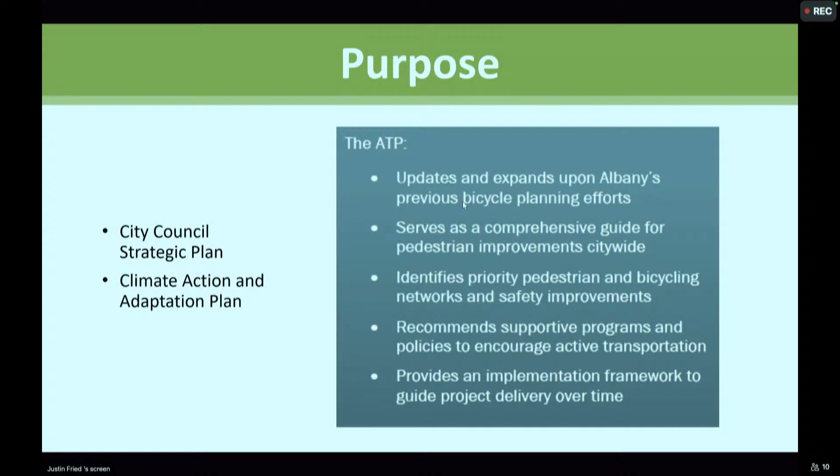Briefly recapping the work that's gone into bringing us to tonight: the update process has gone through three phases. The first established the goals and reviewed existing conditions of the network today. The second focused on the future vision for both the pedestrian and cyclist networks. The third identified priority policies, programs, and projects to implement that vision.

Each of these phases went through a series of development, starting with a technical advisory committee made up of city and partner agencies, departments, and representatives to review materials, then a public community meeting and online engagement, then bringing the content to the Transportation Commission for discussion and feedback, and then on to City Council. We've gone through three rounds of this, developing the plan content packaged and provided to you tonight.

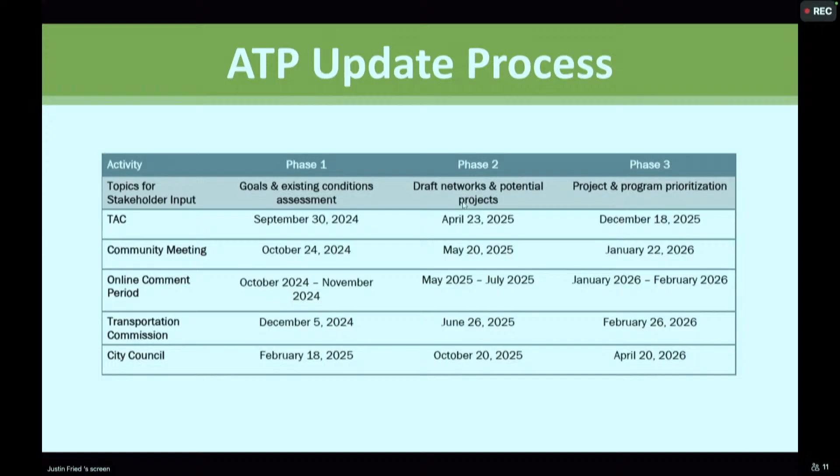Aside from those phases of development, we also had a couple of focused parallel engagements that took place. One was looking at schools, really starting with a kickoff meeting with AUSD site leadership to talk about how to effectively engage the school community.

The culmination of this engagement was in May and June of last year, where we engaged with a range of AUSD stakeholders, had one-on-one meetings with each of the principals, attended two coffee with the principal parent meetings, and had a discussion with the high school leadership advisory students. That led to what's in the plan tonight: specific school access projects that are identified, and several of which are priority projects in the recommendation.

The other focus area was really on Solano Avenue. In May of last year, City Council provided direction for city staff through this process to develop an alternative configuration for the street that reorganizes parking to parallel on one side and 60-degree angle parking on the other, to provide an uphill separated cycle track.

In May through July of last year, the engagement on the future network included a discussion of the Solano Avenue corridor. We had a focused technical advisory committee discussion specific to Solano Avenue in August of last year, followed by door-to-door and online outreach to Solano businesses to talk through concepts.

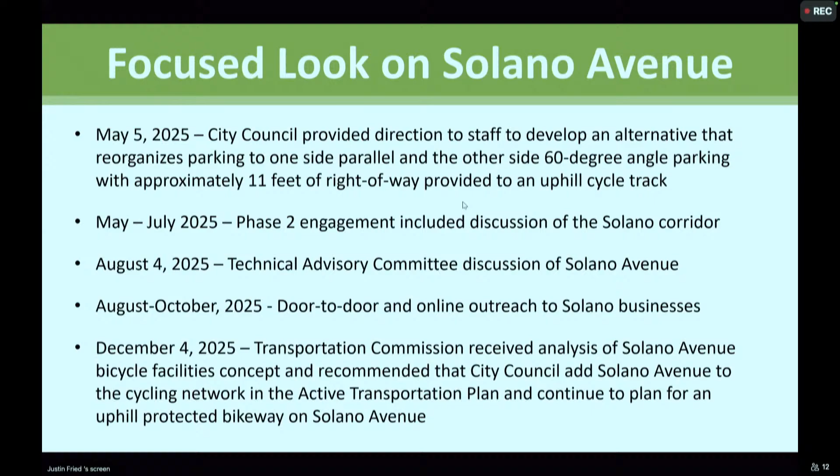I'll also note, since this was a topic of discussion at various points in the development, we called out a focus on how we're using terminology in this document. Walking, biking, and rolling is a term used to reference that there are a range of different mobility options and users of these networks. We do still use pedestrian network and bicycle or cycling network because they are often distinct. There are places, like shared use paths, where they are the same, but in other instances they are separate facilities.

But we want to acknowledge that when we're using those terms, they are speaking to a wider range of users than just a fully mobile person walking. There are a range of people using the pedestrian network, and similarly, a range of devices now using the cycling network.

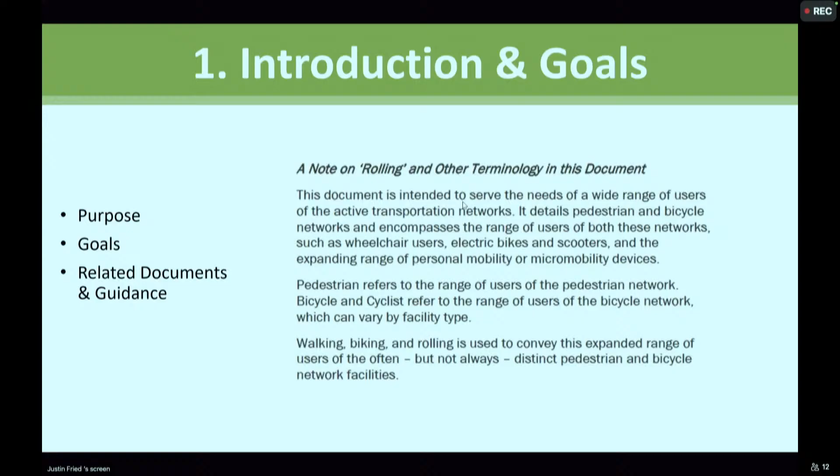As I talked through already, in the work that we've done over the past two years, the second chapter really focuses on detailing that work, the flow of development of the content that's in the document, and the stakeholder engagement that went along with that.

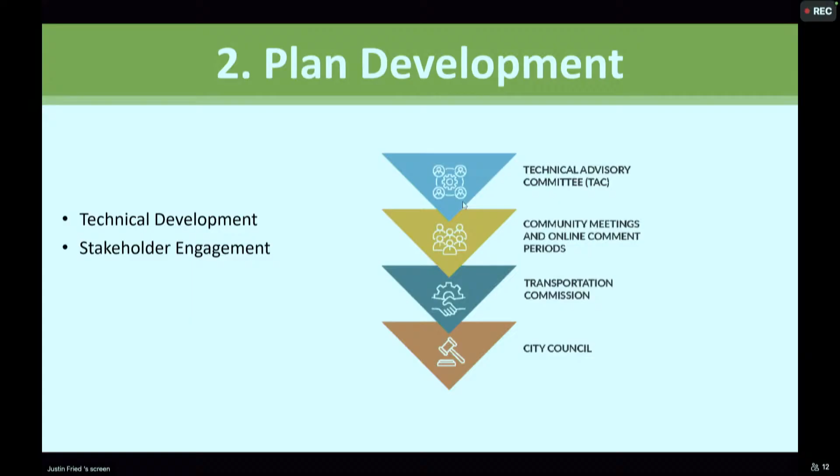The third chapter is the existing conditions review. There were a couple things I noted in the staff memo that are new to this chapter, so just highlighting that for the commission. One is, within the existing mobility networks, there's now a discussion of existing bicycle parking and survey work that was done for that.

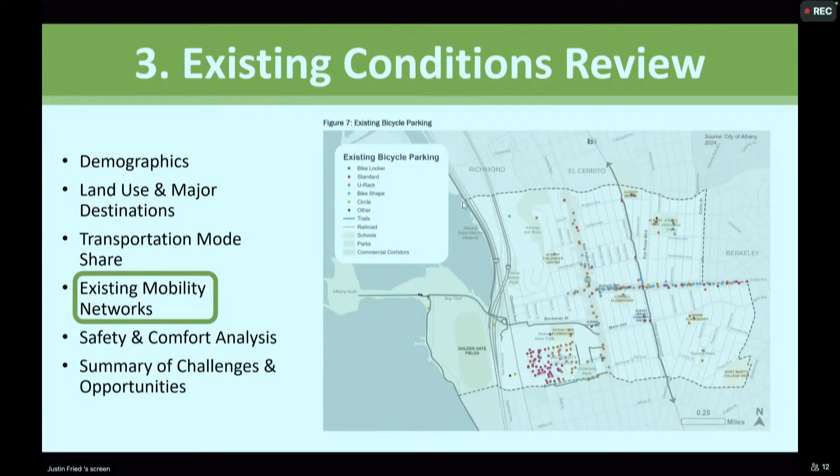And in the safety and comfort analysis, there is work that was presented during the second phase, but is really an existing condition analysis of the pedestrian network and the sidewalk gaps and challenges that exist on the current network.

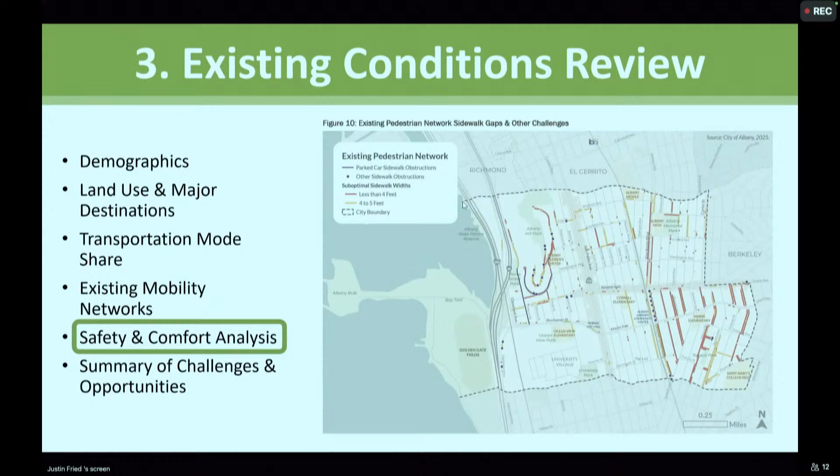Chapter 4 details policy and program recommendations, and just calling out that the policy recommendations—I believe this is the first look at that. It was developed earlier, but I don't think we presented them directly to the commission before now. So that is a new element.

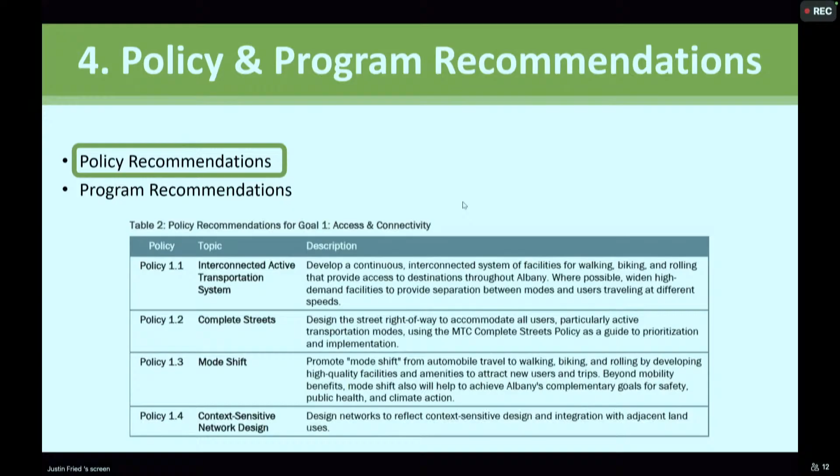And then Chapter 5 gets into the network recommendations. This was the outcome of that second phase of plan development. It details the active transportation networks, the network quality guidelines associated with those, and really talks through the levels of the networks that are developed and the priority biking and pedestrian networks that have a higher comfort guidance for those.

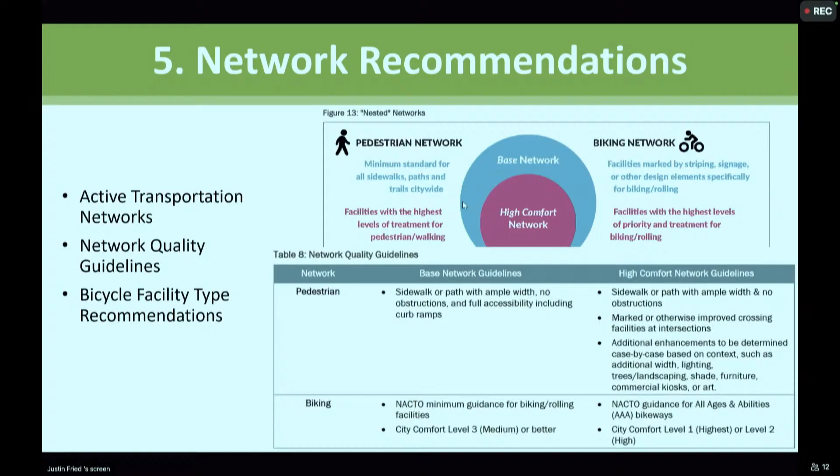And then calling out a couple of new items, just to highlight changes since the last presentation of these.

On the proposed pedestrian network, the main change to note is that the priority network, the high comfort network, is now brought to the public entrance of Albany Hill Park, going along Hillside and Taft. The earlier version came from the south from Catherine's Walk and utilized the informal trails on private property. In staff review, as well as in the project development, it really makes sense to bring the priority network to the public entrance of the park, so that change is recommended and reflected here.

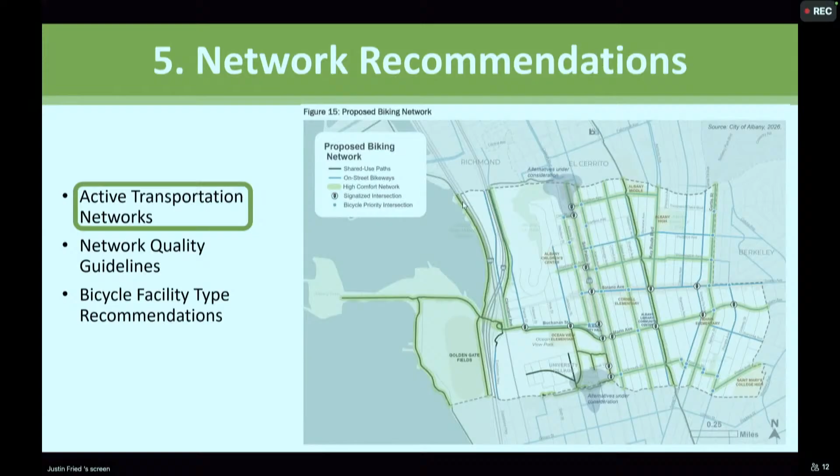On the biking network, the main changes since the last public review are that a signal icon has been added to Kains and Marin, where a Hawk beacon is planned as part of the Alameda County Transportation Commission parallel bike project.

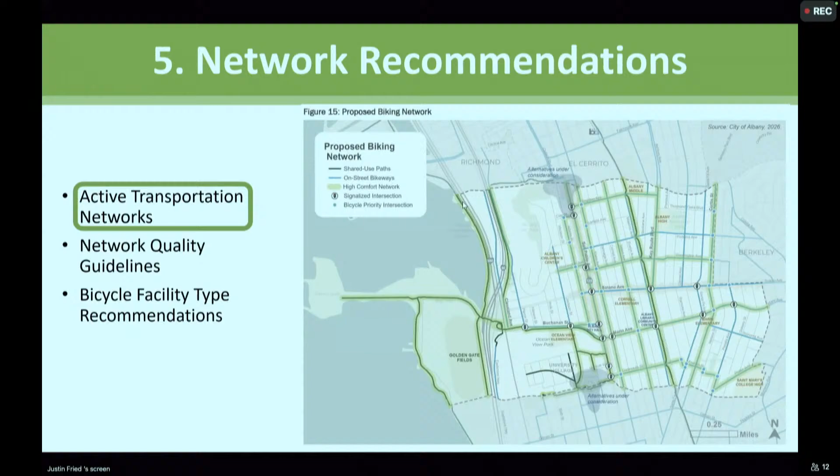And the intersections along Curtis, Marin, and North have been added to the bicycle priority intersections list, because they reflect crossings that don't have cross traffic controls like the other ones. So they met that same bar for being identified on that list.

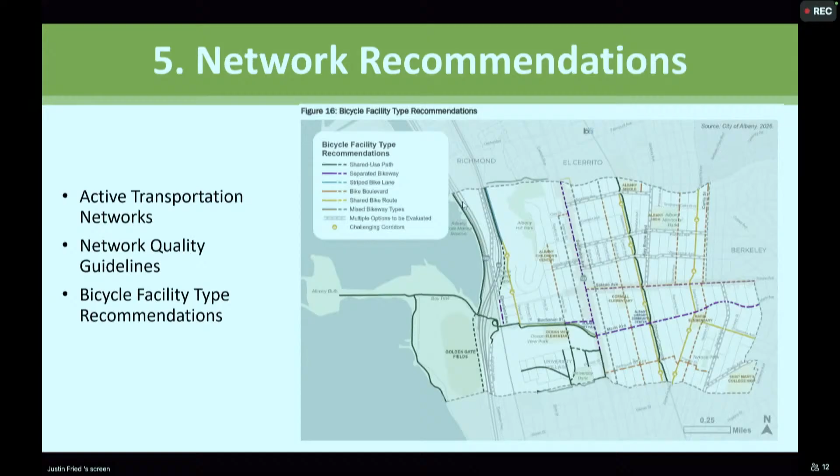This was presented as part of the discussion of projects, but it's also a useful map, so it's been incorporated into the network recommendations chapter. It identifies, based on the priority networks and associated guidance, where there are facility recommendations, what areas have multiple options that could meet the guidance and need further study without proposing particular facilities, or, as with Solano Avenue, ones that already have particular facility recommendations made as part of the plan development.

Chapter 6 then goes into the implementation recommendations. It identifies the priority projects that were the discussion of the Commission's most recent review of this plan in March — or was it February? So long ago.

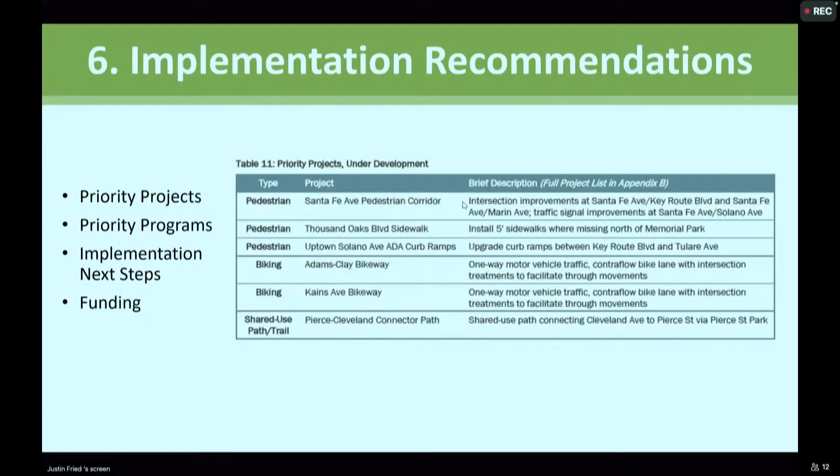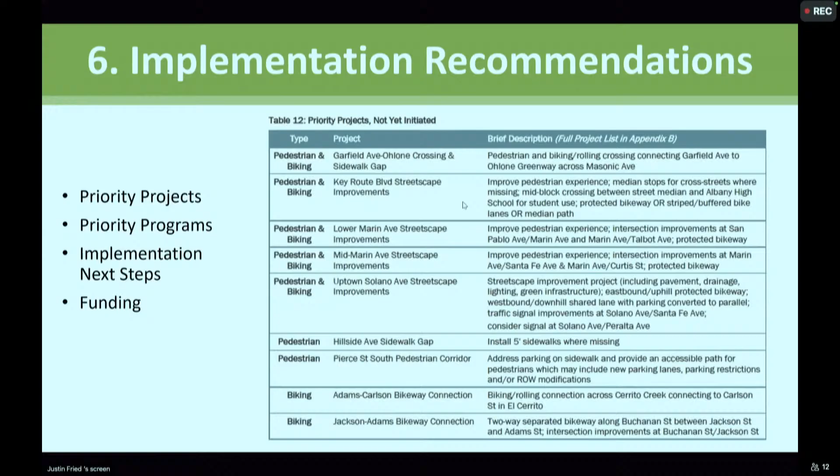The organization is a little different, so I've shown those here. It has a table for projects that are already under a stage of design development, and then tables for the priority projects not yet initiated. There are two sets of those — I think 15 projects on that second list, reflecting feedback from the Commission and from the City Council discussions.

And then there are 4 priority programs identified. The main one that I think has had a change in how it's described and identified is the first one: intersection safety and visibility.

Previously it was focused on the daylight zone and areas where the red curb at intersections could use additional treatments for visibility. But there were comments related to accessibility and intersection crossing improvements, which are often related to visibility and to making it safe to cross. So the program was broadened a little to focus on a level where you need a new crosswalk, which may involve curb ramps as a larger component to deliver, or may have the visibility component — a range of intersection safety things that as a program we might be able to tackle before a broader project or corridor gets to them.

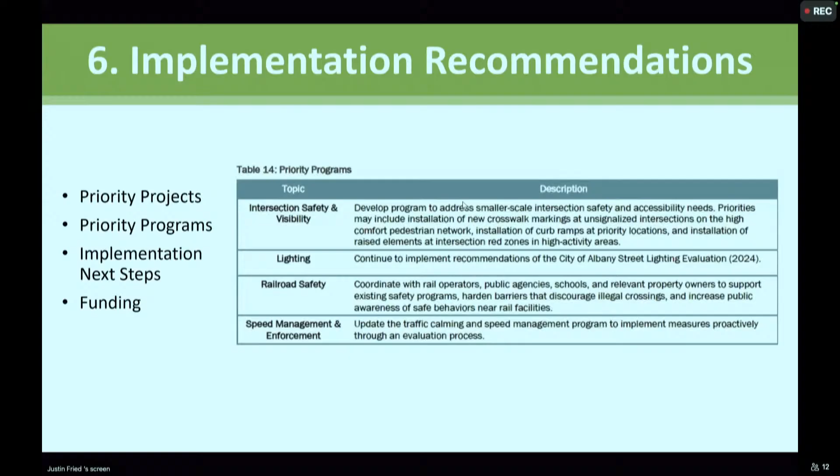So it's folding in a range of things that come up often but are beyond maintenance level activity, where we might not want to wait until we get to a larger project to tackle them. That is the program recommendation.

The final piece, Appendix A, documentation of all the engagement materials and feedback, is forthcoming and will be added with the final revisions. Appendix B is the more complete project list, with the priority projects called out, and now reflects two additional groupings: other identified projects that are on the high comfort networks, and the more complete other identified projects that are not, reflected in the appendix.

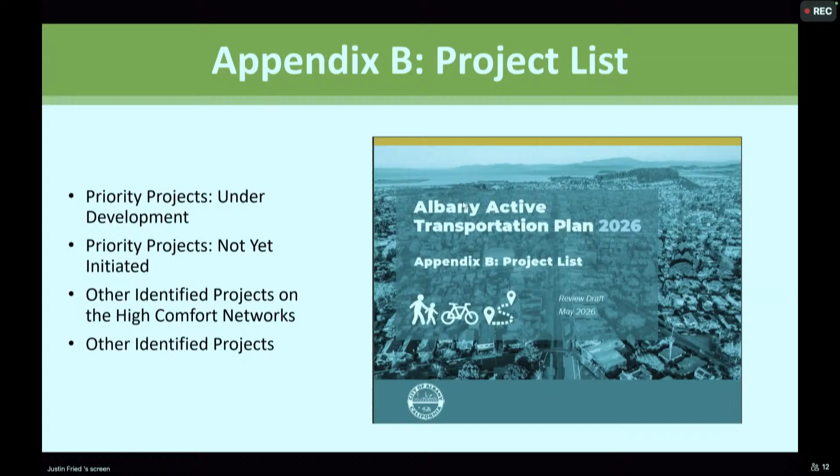So that is the document and the latest changes and updates. After tonight's meeting, the next steps are final revisions and layout to make it a more final document, and to bring that to the City Council for adoption.

So the staff recommendation, pending your discussion, is that the Commission recommend that City Council adopt the 2026 Active Transportation Plan. And with that, I'll open it up to questions. Justin, any questions from the Commission?

Hi, I had some questions. We're doing only clarifying questions now, right?

Let me take a moment to go off agenda for one quick second. Hi, I'm Britt Thiessen-Tanner. You can call me Britt Tanner Thiessen, or Britt Thiessen, I'm getting my name changed. I am new, I come to the Commission after being a traffic engineer for San Francisco for 23 years. I currently work at MTC.

So I have some traffic engineering experience. My question is, how was the high comfort network decided as part of this plan? I'm curious to see that Marin is on the high comfort network, but it's described as not being high comfort. It's literally described as being low comfort. So I'm not trying to give an opinion, I'm just trying to understand how the high comfort network is determined. Is it essentially a subset of, are you talking about the biking network?

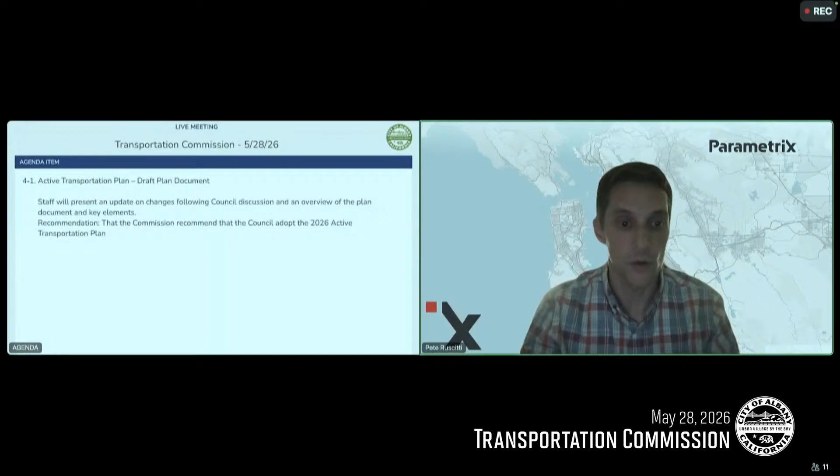Certainly, I think through the network development process, we've had certain corridors that have been added or taken away, and that text may not have been updated to reflect the latest network. So we'll make sure that that is consistent. Thanks.

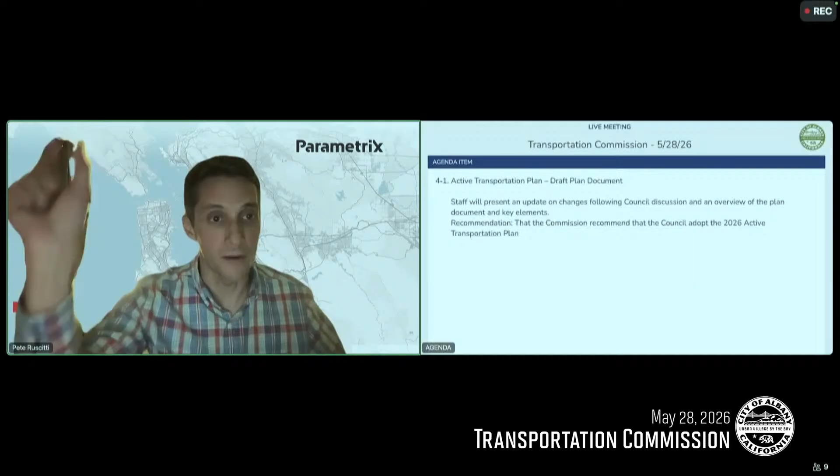And we definitely have that information. I think it's actually probably hidden in a column. We hid it just to make it fit on the document, but we can certainly add that back in.

You could add it to the project title, that might help, since the descriptions are longer than the titles.

Something I wanted to bring up, and I feel like it's a little unfair since Ken isn't here and he was the proponent of this, but going to table 14 for the priority programs, I know he brought up railroad safety as something he wanted in the list of programs, but I don't know if we agreed that it should be a priority program. Am I misremembering that conversation?

I think technically we did suggest that we wanted it to be a high priority program. Okay, never mind then, I thought it was just going to be added to the program list. I can check my notes, but I think at least there was no disagreement that it would be. That's fair, that's my recollection. Okay, that's fair.

The only other comment I have, and I'm not sure exactly where it fits, but one concern is that there's no clear program or path for coordination between Albany Unified School District and the implementation of some of the projects in this ATP. I bring it up because historically we've had issues, like the development of Ocean View Elementary and Marin, where now that Ocean View has been built, we're doing retroactive fixes to improve bike and pedestrian access to the school. There are some similar issues at Marin, though not as significant.

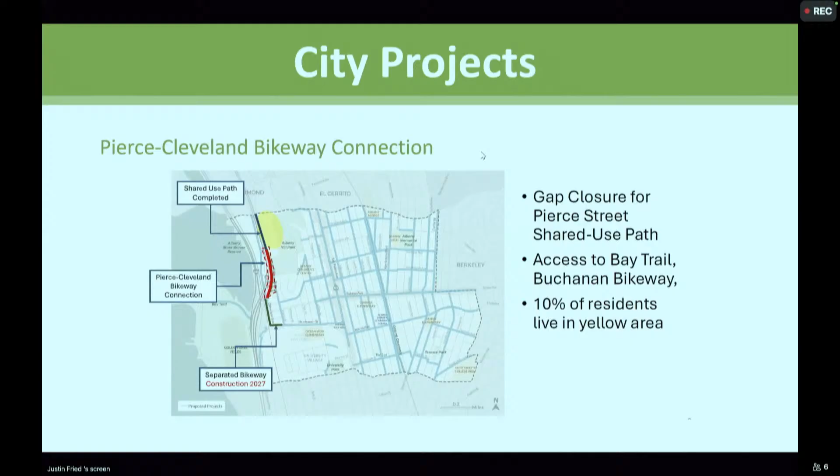We also presented proposed Solano access and safety improvements. Currently we have the ADA curb ramp project under initial design, and something will come to the commission later this year for discussion. Given the issues called out in our local road safety plan and the citywide streetlight evaluation, we have a 10 to 20 year streetscape project we've been discussing as part of our active transportation plan.

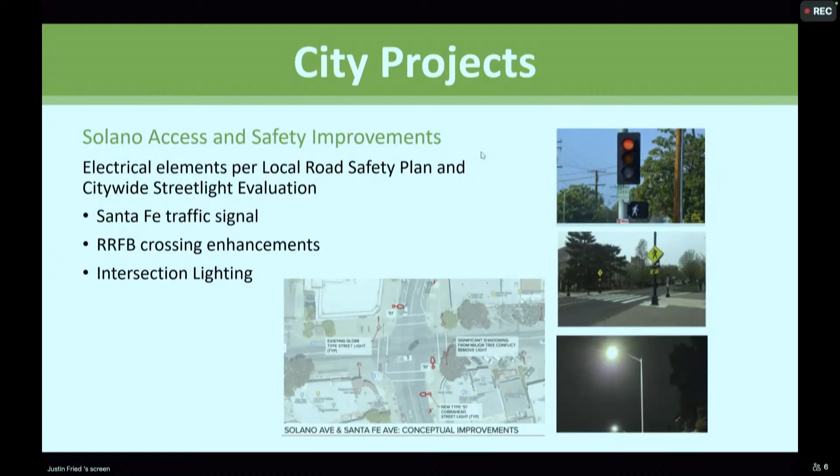Could we do an electrical-specific package — signal improvement at the Santa Fe Solano signal, RRFB crossing enhancements, intersection lighting — things focused at intersections that could complement the accessibility improvements we're planning over the next couple of years, while still leaving open the broader streetscape discussion, but addressing safety elements highlighted in our collision analysis that could benefit from improvements in a shorter time frame.

The third is the new pilot project for Safe Routes to Schools. We have some older site assessments for several of the schools, and several projects that have been under development or design discussion previously but haven't had funding pulled together to implement. We think this could be a good package of projects to address those needs.

This could address the sidewalk gap on Thousand Oaks on the north side of Memorial Park next to the high school, the cycling gap connection originally envisioned as part of a paving project along Brighton that didn't happen at the time but would connect Greenway to the middle school, and additional intersection crossing improvements, curb ramps, and pedestrian access improvements identified in some of those site assessments. That's the third project we're recommending submitting.

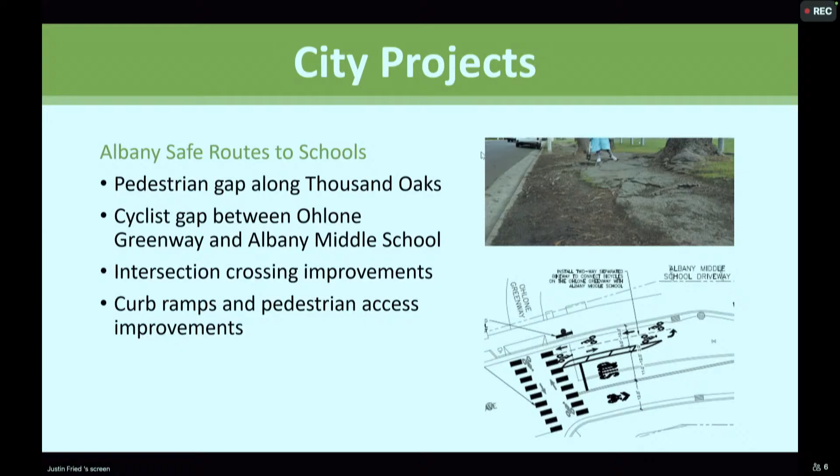So with that, the recommendation is twofold. One is to recommend to council the three projects as detailed here for submitting for the call for projects and entering into required agreements upon any award for those. The second is your review of the Complete Streets checklist that was provided and any comments you have on that. I could pull that up if helpful, since I know we had a meaty item before this. Happy to run through that in more detail if warranted. And with that, I'll open it up for questions.

Thank you. Any questions from the commissioners? Justin, I'm just curious about the number of projects that were submitted - was there any reason we limited it, or how many could we submit, or is there a ratio where you submit 5 and get 2? How does that work? There is a limit. What we recommended is not at that limit. I think it was up to 4 projects, plus the Complete Streets pilot didn't count toward that. So we could submit more, but we're also limited by staff capacity, and acknowledging we're a relatively small jurisdiction amongst the county, I think that's fair enough. Our recommendation is just in terms of what seems the most competitive.

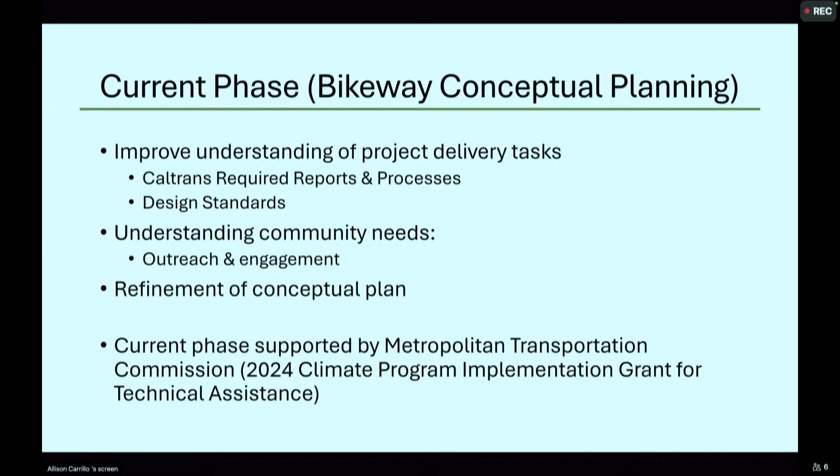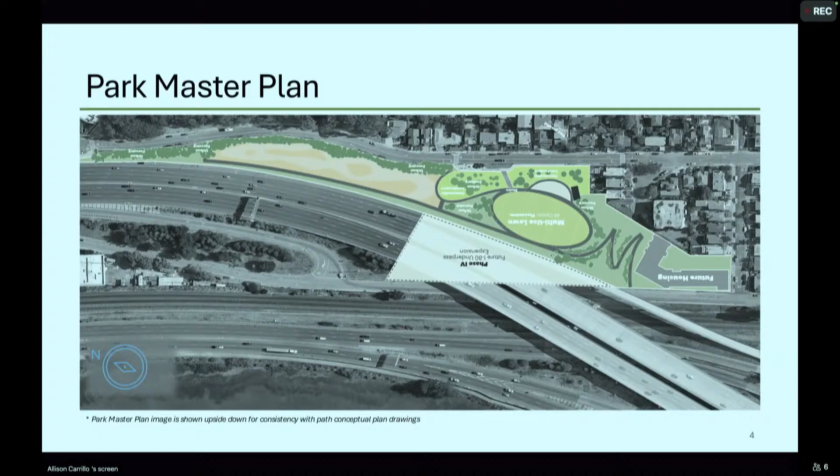Shown here is an image from the park master plan that gives a high-level idea of a path along with programmable space. If you're familiar with the park master plan, this is upside down, because on our design drawings it was reversed to have the north arrow going towards the northeast, and I didn't want to confuse folks. So I'm clarifying that for anybody who may be twisted around.

The current access and circulation within the park is a major component of the park recreation discussions. We also have the larger access needs to get to the park, which is more of an active transportation front, but the access also has to extend through the park. So we spent time talking with Parks, Rec, and Open Space to delineate the difference between a circulation path and an access path.

There were various configurations we looked at—whether we could maximize programmable space by combining the bikeway and shared use path with local circulation, or whether it's better to separate them. Following the initial layout and conceptual design from the park, it was showing two separate paths with slightly less programmable space.

Give me a second, I need to get my pointer working. That will help a bit with talking through this.

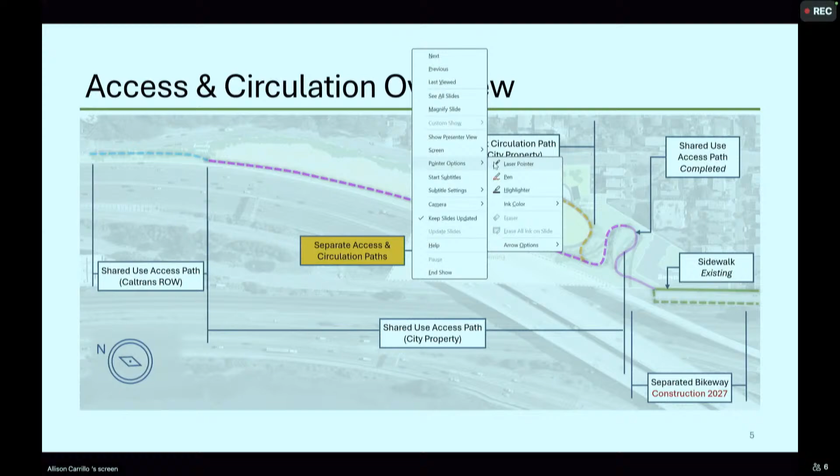In light blue here is the Caltrans right-of-way. The Pierce Street path, the existing portion next to the condos, connects over here. We're looking to extend the path through Caltrans right-of-way to avoid a crest here where we'd otherwise have to climb and then drop back down. Then here is a portion of city-owned right-of-way, or city-owned property, currently an unused open space that is fenced off.

Then we move into the actual park itself. This is the portion of the park that, if you visit, you can actually access right now, although there's only restrooms and a small playground, along with some walking paths. We are absolutely looking to improve this park in the near future if we can find funding.

Following this, we have a portion of the path in light purple. This portion has been completed under the Saha development, connecting to this portion on the right and the existing sidewalk shared use path on the left. As I mentioned previously, we have a separated bikeway component currently being designed on Cleveland Avenue.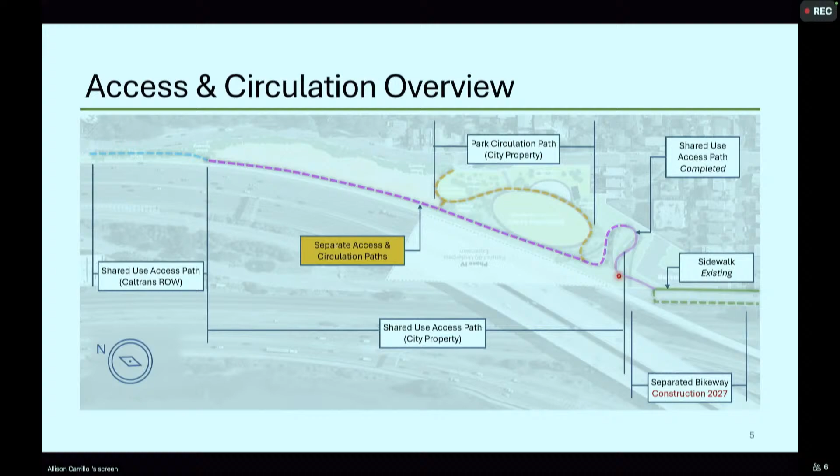In the larger context, this is the gap closure. This is important for access to the Bay Trail, and we're also looking to connect to bikeways that El Cerrito and Richmond have on their plans. One of the most important things to highlight is how many people in Albany live in this yellowed area—10% of residents live here, so this bikeway will help a good percentage of the city of Albany.

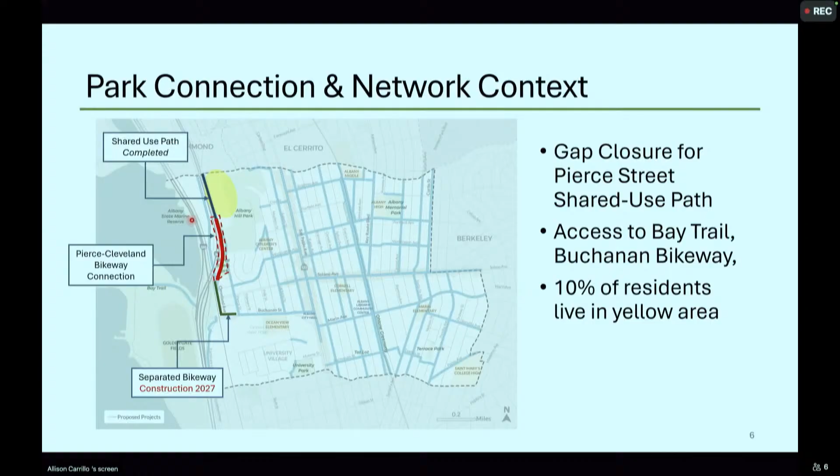Now getting to site challenges, because this is always the fun part in civil design—jurisdictional challenges. In red is the existing access control fence. I mentioned we can walk through freely within this area, but even though this area is city property, we cannot freely walk through it. There is a Caltrans access control fence that remains there.

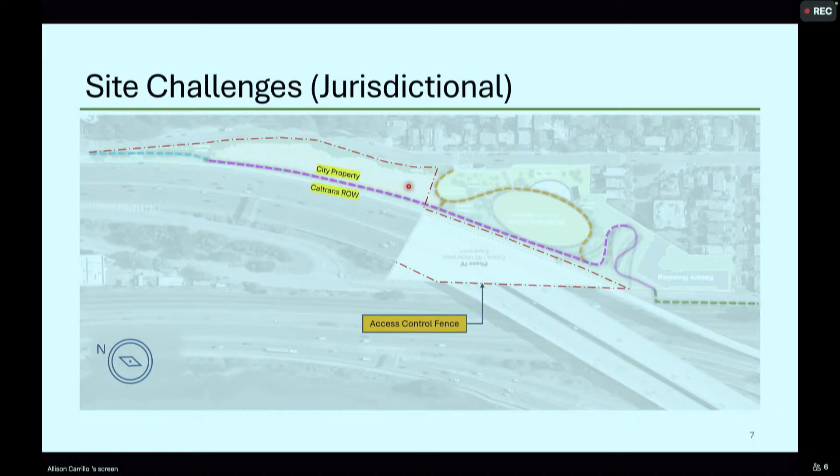So going back to challenges with that, it's a small project within a large interstate, meaning it goes through federal level approvals for access control adjustments. Even though it's a small project, it triggers almost every type of report imaginable—some were surprises to us as well.

That being said, we do have specific contacts now within the different departments who will be reviewing this. We just need to get our designs to a point where they can set up their internal funding to support the reviews, which generally means reaching 100% design development on our end. That doesn't mean it's a construction-ready set—it just means we're satisfied with our final configuration. So it's very important that once we get to that point, we don't make major changes, which is why we want to have these conversations early on to figure out what we want out there.

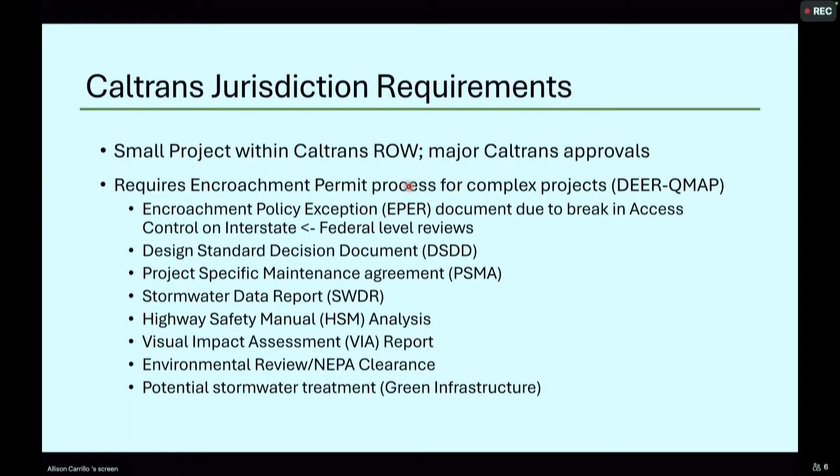Other site challenges are the actual connections. This is again a civil challenge, luckily not a bureaucratic one, and sometimes easier to deal with. On the south connection, this switchback you're seeing is because of grade challenges, meaning we are climbing a hill. On the north side, we have site challenges with the narrowness of the area we're working within, making sure we create a comfortable environment that people want to use.

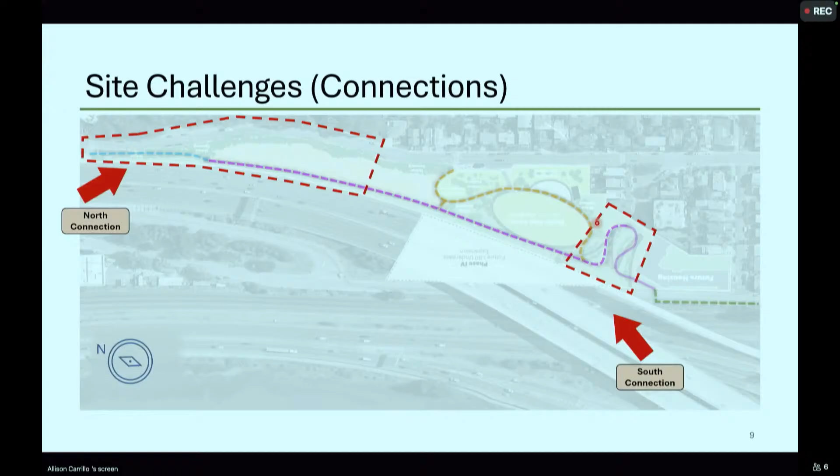Going into more detail on the south side, there's a portion of the bikeway that's been constructed up to this point in space, right here where my cursor is hovering. We have to make the connection through here, and to do so in an ADA-compliant way, we are lowering that corner of the property by 8 feet. There will be a lot of earth being moved, as we saw happening with the first half of the path constructed by Saha Development.

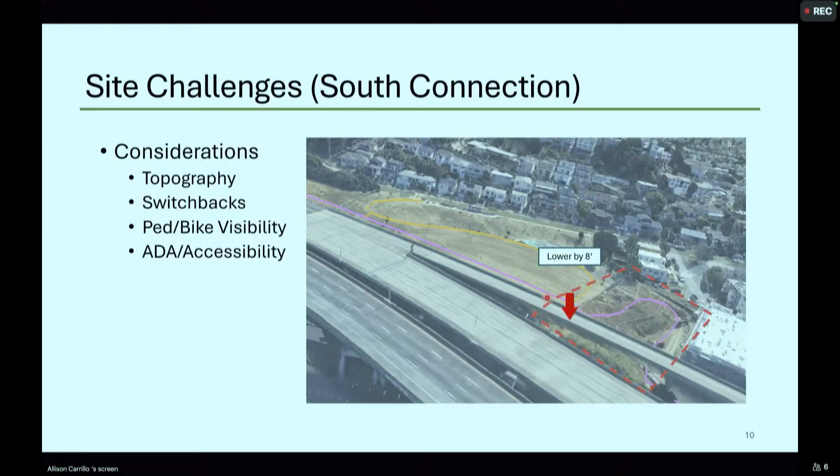The good news on the civil front is that this is an old freeway overpass, so from a structural perspective, this soil will hold up to some changes. This is the conceptual grading plan showing how we will maintain an accessible path throughout. What I wanted to draw your attention to is this piece here—we are at a very steep embankment, an engineered slope that Caltrans installed as part of their prior work, and we will be entering that area, so there is some coordination with Caltrans needed. Despite this being our property, they have a maintenance easement in that area.

Other site challenges include making sure we have bike-ped visibility, and understanding what path widths we can build versus what path widths we want. Especially in the switchbacks, we're going to have a hard time getting wider paths, but as we flatten out, we may have room to provide a little more width. We'll talk about path widths and would appreciate feedback on them as we move on in this presentation.

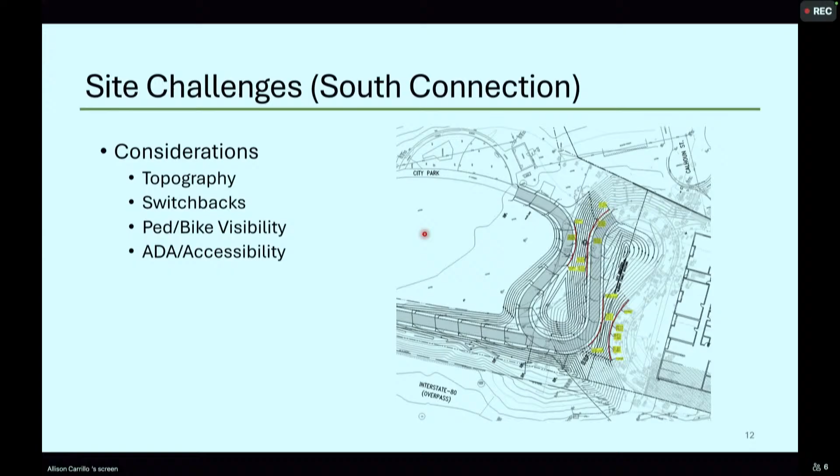Site challenges on the north. As noted earlier, it's a very narrow property. The reason for going through Caltrans right-of-way in this area is to avoid a crest that peaks over here. We do have an existing sidewalk on the east side, but it's not the most comfortable for getting to the park, nor for cyclists who have to come up in topography, come up in grade, and then back down. We have an existing interstate at grade in this area, primarily without guardrails. Further south, our property is actually slightly lower than the interstate, so cars are effectively at head level.

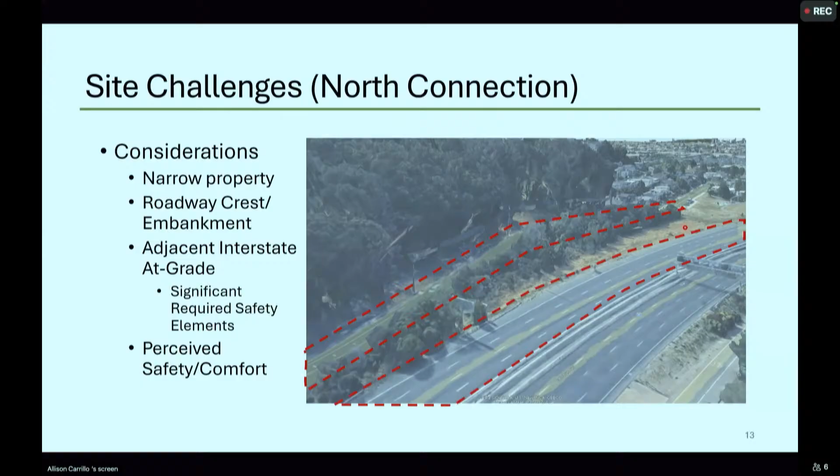So one of the things we really want to focus on with this design effort is how do we make this area more comfortable so that when we build it, it will be used.

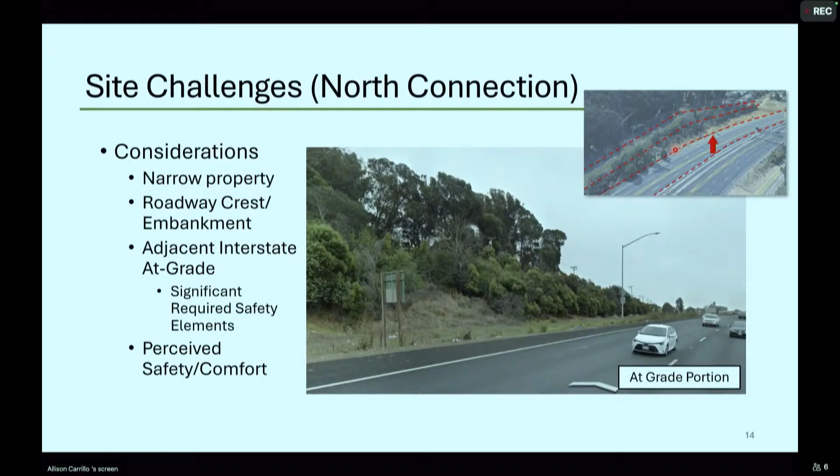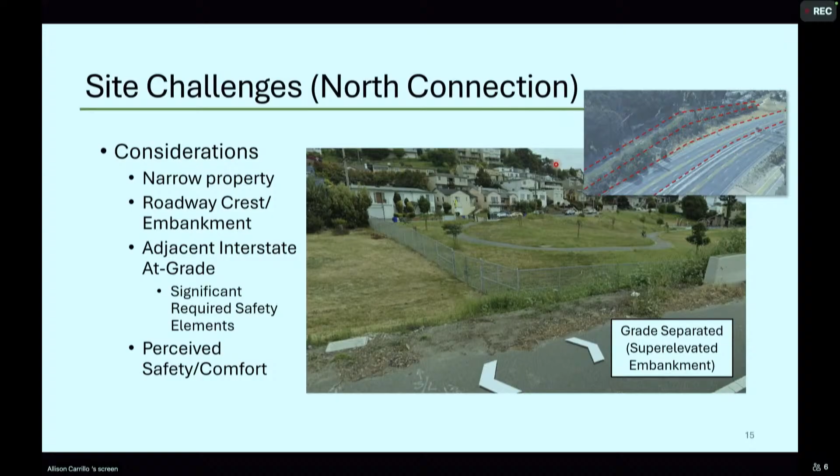This is an image with an arrow showing approximately where this is taken. This is a section of the Caltrans right-of-way where we are at grade with the vehicles. As we go further down towards the park, the cars are now elevated above the park. Finally, next to the park, we are in a grade separated overpass. This is where comfort level is expected to improve.

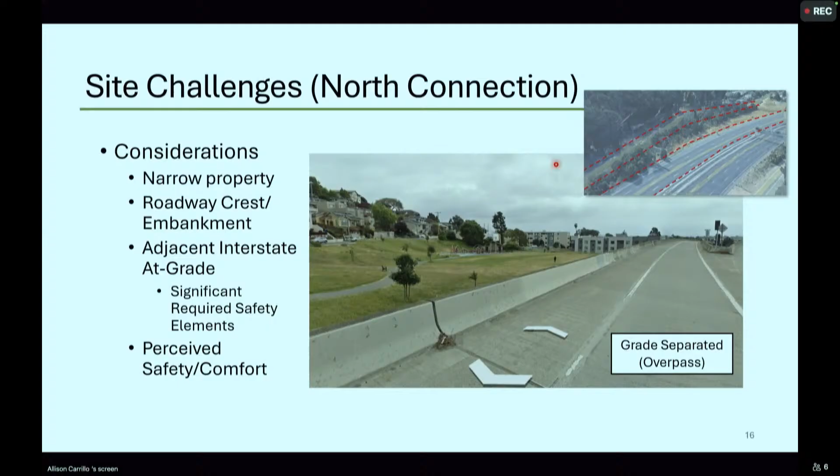Going back to the comfort question, this is from the park's master plan where the proposed alignment of the path follows the western edge, closest to the freeway, in order to maximize programmable park space. However, in discussions with Caltrans, with some of their requirements for clear recovery zones among other things, there are proposed changes to this configuration that we wanted to discuss with you.

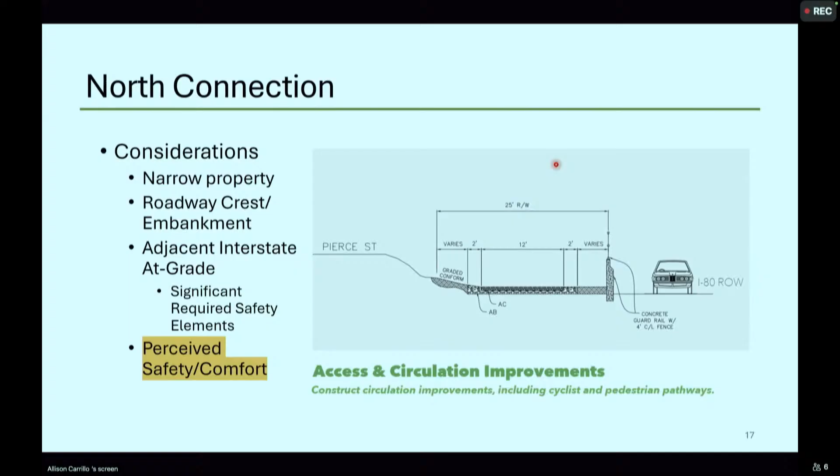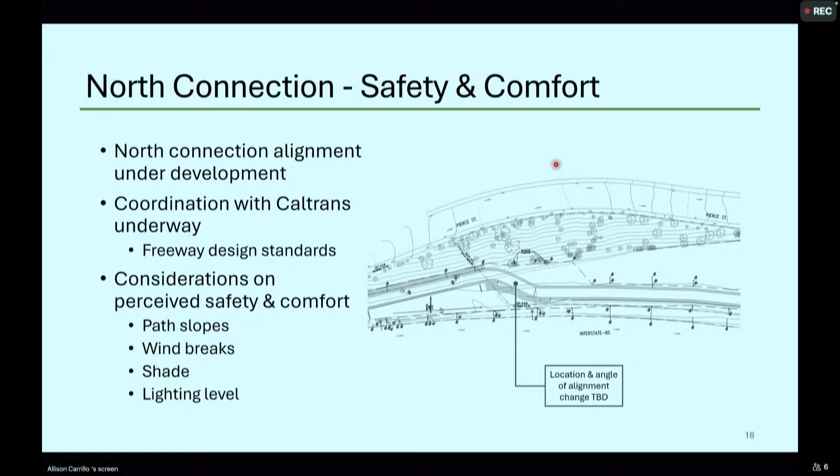Outside of just how close we are to the freeway, this is a very windy area. There's not much shade. Trees generally do not grow well in old freeway embankments, and lighting levels are something we need to discuss. Caltrans has gone through and put in their own lights, and we want to make sure we have a design that properly lights, doesn't overlight, and doesn't underlight the new pathway. These are things we're looking at.

Other site considerations we were looking at: how do we minimize the amount of off-haul of soils, where we need railings, whether there's room for stairs, and lighting, which we are looking at installing with this project. Any kind of planting and screening to improve comfort. There's drainage needs, and there are existing utilities that run through this area that we're looking at as well.

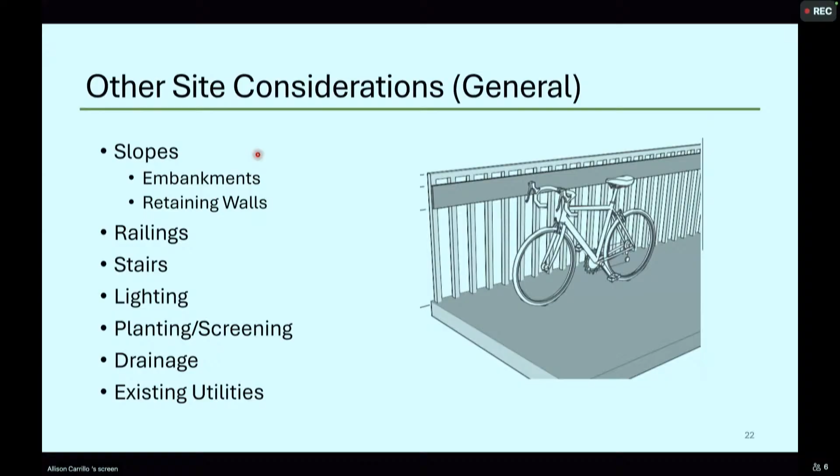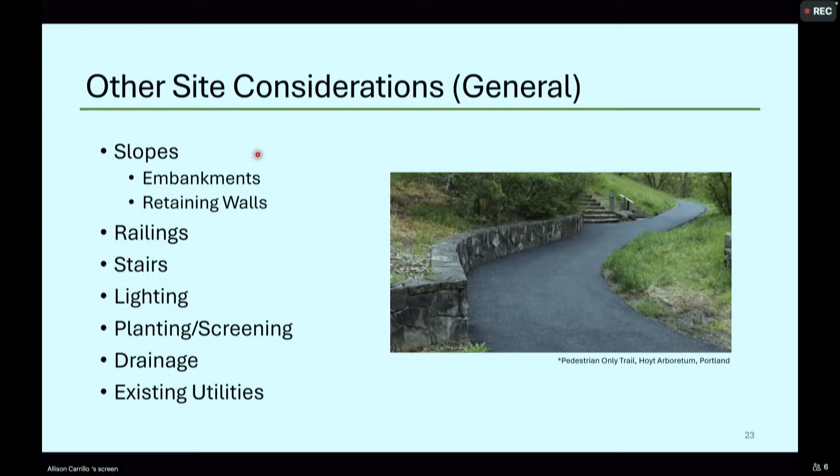Just a few different iterations of images of what these could look like. This is a very nice path up in Portland. I hope we can find the funding to do this type of retaining wall. We'll find out—they're very pretty.

We did take this project, as I mentioned, to PROS. I think I said January, but I misspoke—it was in April. The initial feedback was that they wanted more rendering and section cuts to assist with their understanding of what the park would look like and to understand grading. They wanted to discuss improving bicycle and pedestrian interactions.

We maintained those trade-offs between separating the access path and circulation paths versus combining them, but landed on keeping separated access in parts. In areas where we do not have the property width to do so, we will have to combine and discuss bike-pedestrian interactions and how we want to deal with those.

They also, and this was something I was very happy to hear, wanted to explore changes to the northern park layout to reduce the length of the straightaway. There were concerns that with a very straight path continually running downhill, bicyclists might gain a lot of speed, so they wanted to look at how to traffic calm on the shared use path. They had questions on path widths and expanding the shared use path to include some striped pedestrian areas as one idea, and it's something we wanted your feedback on as well.

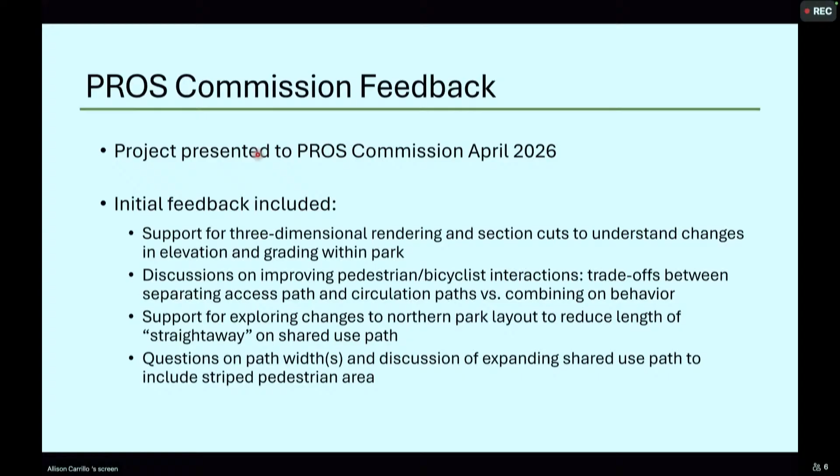And then, as soon as we get to a wide enough area, providing an alternative pedestrian path separated from the bikeway, creating some diversions in the bikeway path so that there's less risk of somebody zoning out and hitting speed.

This area potentially could be one with more activated space, so it creates a situation where it doesn't feel like you're on a path by yourself. That's something we wanted to explore as we move further into conceptual design.

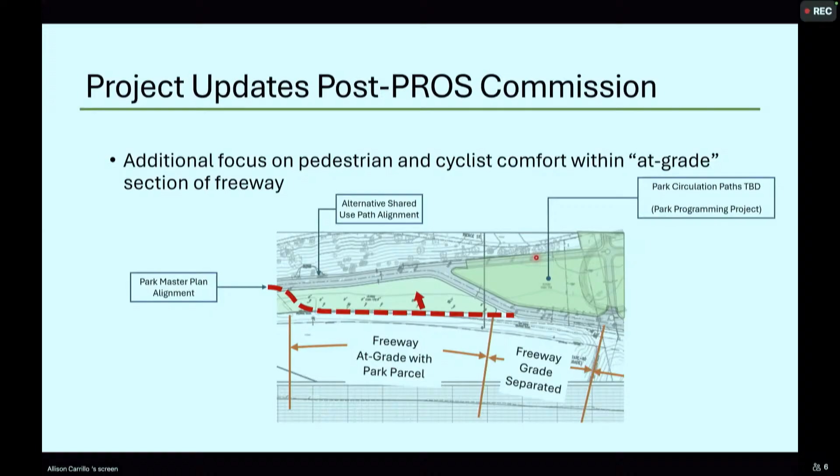But we've reached the end. The next steps here — we absolutely want to improve visuals and project materials as part of the technical assistance grant that we have, so we can better show what these areas will look like. We're working with a consultant to bring on some high-level architectural renderings so we can see how the grading of the park may interplay with the grading of the bikeway.

We also have some cross sections in the materials tonight, but we do want to have more cross sections available. The other thing we could use support on is identifying opportunities for additional community engagement — if you're aware of any places we can go and outreach to bring this project to residents, that's something we definitely focus on under this technical assistance grant.

And then confirm the completeness of the project scope. That's asking a lot, considering there's not much information given, but at a high level, whether this speaks to some of your needs from a transportation perspective through the park.

There are details we need to go into at the conforms — so at each end, not just on a civil front, but on a traffic engineering and pedestrian safety front, bringing people across the street at Pierce Street, 555 Pierce Street, which is the beginning of this proposed path, and making sure that that's safe.

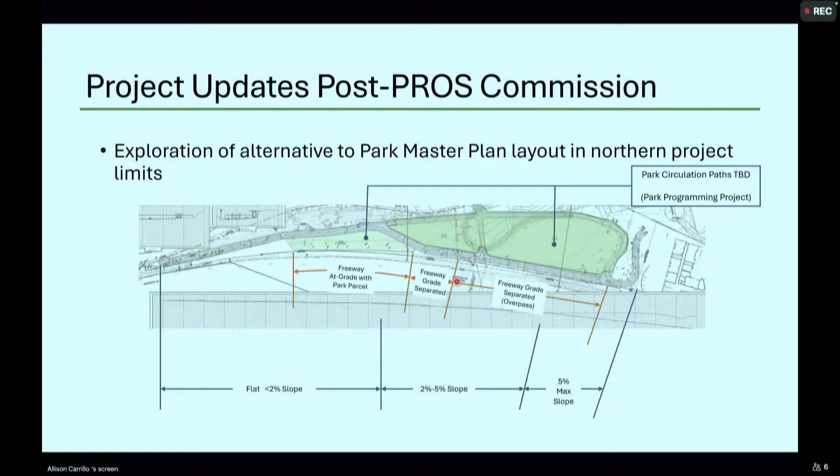I do have one question, on slide 17 - actually, that slide's good, I apologize if I gave the wrong number. On a different slide, there were stairways indicated in red, and they're not included here. I was wondering if those are still part of the proposal and if you wanted feedback on those. So stairways haven't been planned out, but it's something that PROS was interested in including to provide alternative access, so you're not walking through the switchbacks. There are some challenges with those - we want to make sure we don't orient them in a way that someone could accidentally use them on their bike or accidentally enter them from a bike. So on slide 19, the one that has the stairs on it - I cannot see the number on my screen, so I will go back to this one. Yes, okay.

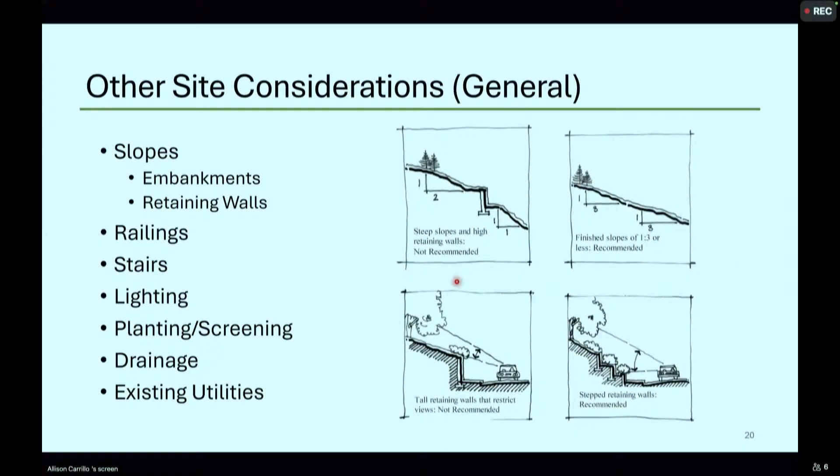The stairway that is basically in the straightaway does seem to do exactly what you were just saying. That's schematic for a staircase as a symbol, not as an actual alignment that we would want. I guess so, that's one comment on that stairway, and you seem to be aware of the issue already.

The second one, I don't understand why you would need it, the second one that's directly up to the playground area, because if there is a path that also curves and connects over, I feel like that would be redundant. And I believe if you go up the first staircase coming from Cleveland, you'd actually have to go downhill to go up the other staircase. So I just don't understand why it's there. It's symbolically showing some staircases. We have not gone through the level of effort to know exactly where they are, but you're right, that one may not be needed.

Okay. Any other questions before we go to public comment if it's here? All right, I'm sorry, I do have one question.

Allison, can you give me just a thumbnail sketch with words of what the separation between the bike and pedestrian path is envisioned to be? Sure. Within the area we have more space, it's a fully separated walking path versus a bikeway, shared use path. Separated by two different paths. So you have this walking-only pedestrian path.

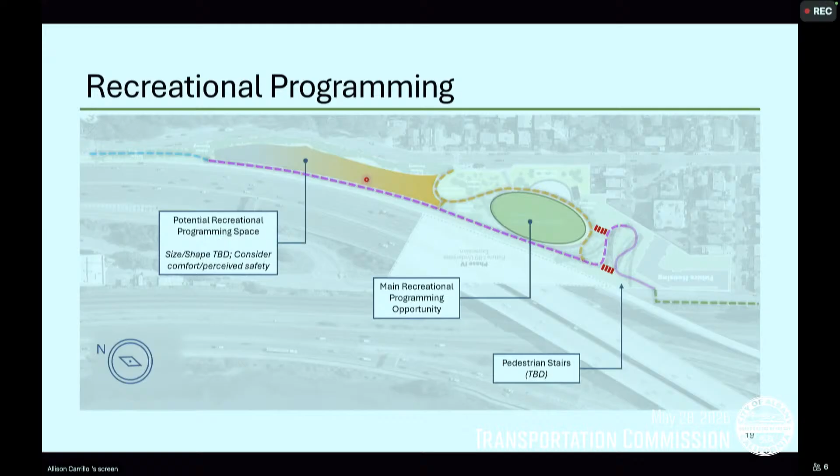So I think the stairway would likely be a dogleg stairway where we come in at an angle, creating a landing on top and a landing on bottom, because we also don't want folks getting off the stairs to go directly into the path without having a spot. So more than likely, if we can fit one in at all, we will need to redirect it that way in order to have more space to build up. Otherwise, we won't get our stair heights throughout.

Also on the curves, you might already be considering this, but visibility is especially important coming in and out of those curves. Speaking of visibility, I also wanted to bring up the grading we're doing in this little corner here, as we have our pedestrian path going back into the shared use path—trying to make that area as visible as possible so pedestrians coming around the bend can see bicyclists and vice versa.

Perfect. So visibility is definitely something we want to look at closer as we get into the renderings, as well as the cross sections of these critical areas. If there are any critical areas you think more rendering or cross sections could be helpful for, whether tonight or later by email, places you have questions about, I think that would be really helpful for identifying where we can focus.

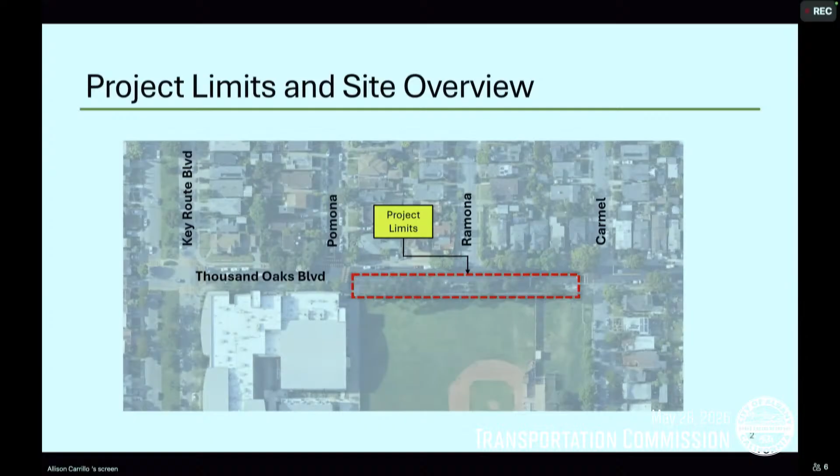So, Thousand Oaks sidewalk reconstruction. This has been on a lot of people's lists of improvements that are needed. This is located on the north side of Memorial Park on Thousand Oaks between Pomona and Carmel. I'm going to try to go quickly. If you can stop me if I'm going too fast. We have persistent feedback from folks about the conditions.

It is in high need of rehabilitation. There are changes in the prioritization with incremental improvements on either side. So you see - oh no, I don't have my pointer. Here we go. We have Albany High School, about a little over 20 years ago, updated their new school and built the Thousand Oaks portion of the sidewalk. We also had a prior sidewalk extension during park projects, and then we had very recently some dog park improvements that extended the sidewalk all the way to the Carmel Thousand Oaks intersection.

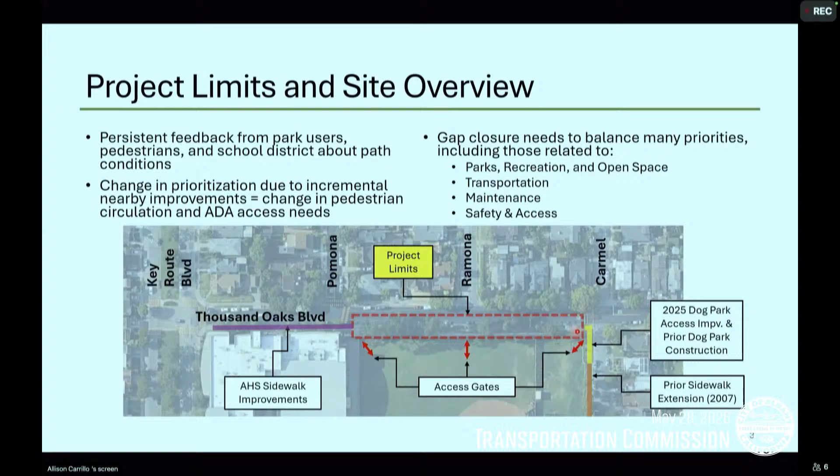At this point, we do want to continue to refine the path and improve it, rehabilitate it through the rest of the corridor. It does need to balance a lot of priorities, including trees. Sorry, I probably jumped over. No, actually, I'm good. So the existing conditions, the asphalt's in very, very poor condition.

As you can see, we have very large trees that were planted in various locations. Some may be volunteers. It's highly used by pedestrians to the park as well as the school, with the nearby baseball field. We did try to repair this in a prior project in 2007. That is quite a while ago. But I don't think they were particularly successful because the tree roots, though trimmed, continue to grow out into the path. That is always a challenge. We want to create a situation where we're not having to go out as often, and one that is where the sidewalk is more appropriate for the level of pedestrian traffic that we see in this area.

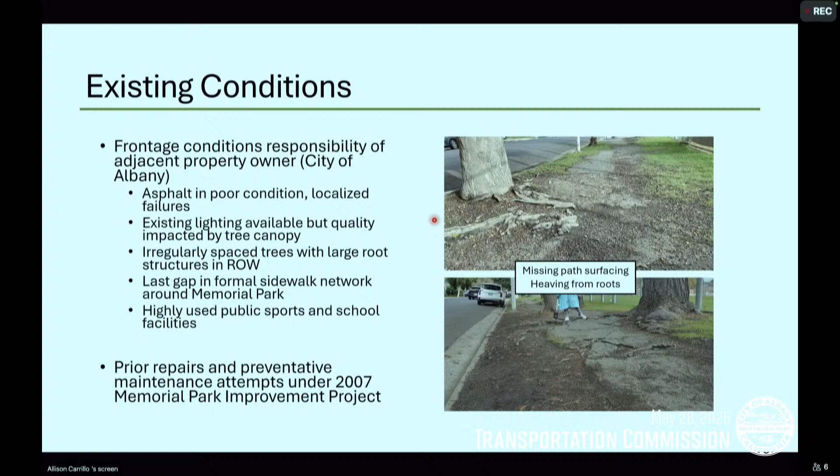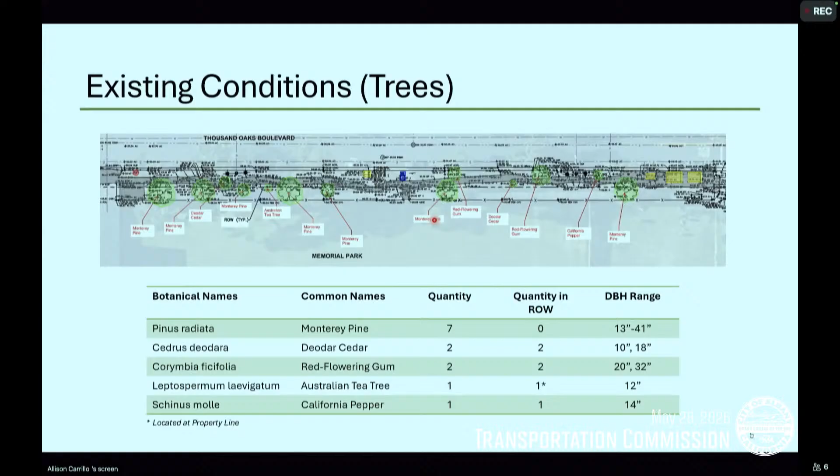Some information about the trees. I think this presentation was initially presented to Parks Rec Open Space, and so we focused a lot about the existing trees out there, as we are unable to make an ADA compliant sidewalk that is meeting city standards without removal of at least some of the trees. And so there is a discussion needed to figure out what kind of sidewalk is desired, and what kind of tree removal impacts we're looking at and balancing those.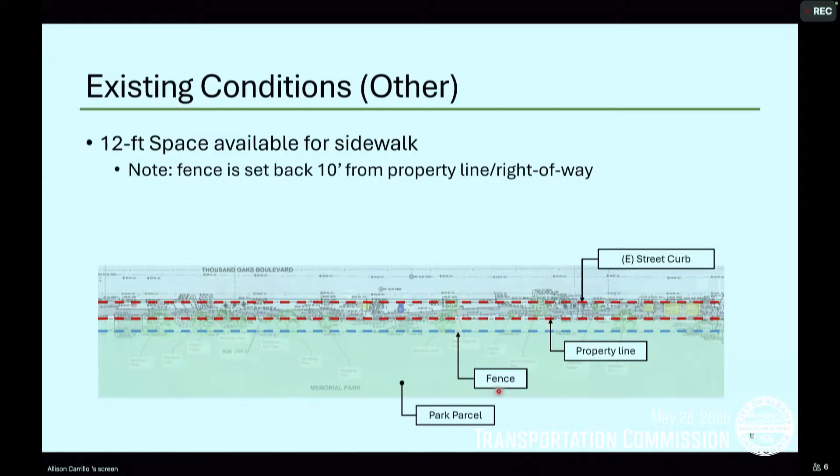There is 12 feet physically available with the existing conditions between the curb and the property line. The fence line is actually set back from the property line, and so it functionally feels like a larger than 12-foot space. There are quite a few utilities in addition to trees, including streetlight poles that are double-headed poles, double-headed streetlights that are shining over the pedestrian path. And one of the challenges, like many places in Albany, is that there's no storm drain until we get to Pomona. So bulbing out and other kinds of localized curb line adjustments are challenging, where we would otherwise maybe be able to preserve trees by bulbing out and routing the pedestrian path around.

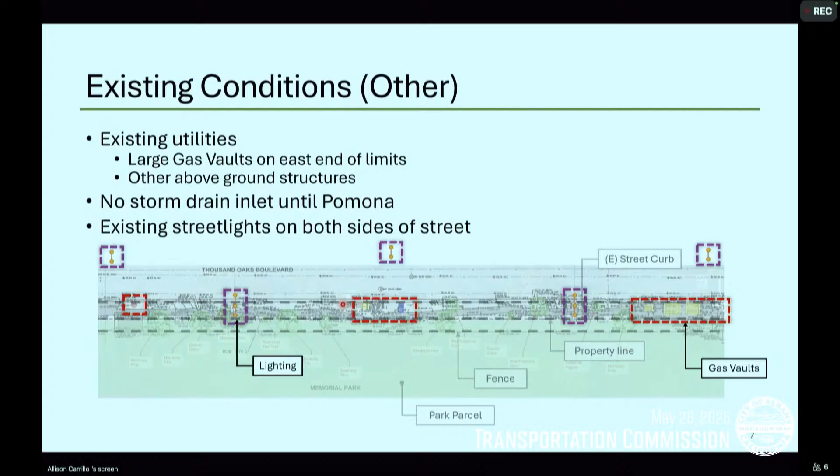One of the interesting things we discovered in starting this project is that the curb line alignments on Thousand Oaks make a few different adjustments. The location just near the school is a 32-foot wide street. We do get complaints about how narrow the street is there. However, 32 feet is still higher than the average north-south street, although lower than our typical collector streets.

On the east side, closer to where the sidewalk in question is, it's actually 36 feet, and that has to do with two different curb line changes or alignment shifts. On the north side we're actually 2 feet narrower, and then on the south side we're also 2 feet narrower on the western side of the intersection.

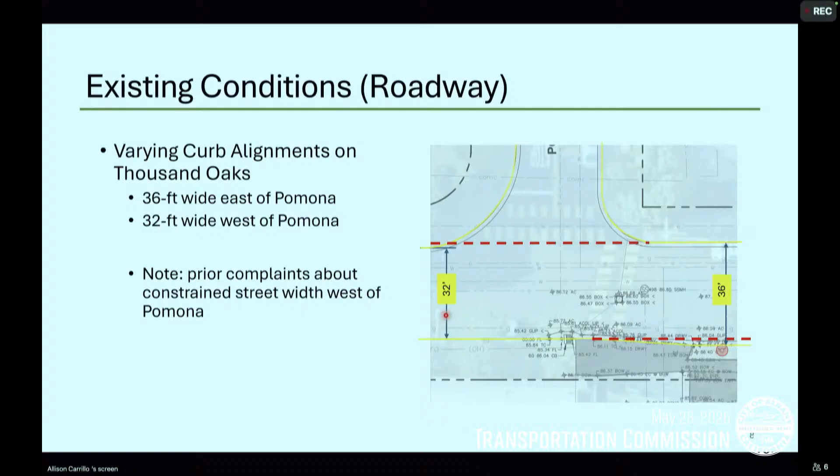So looking at that, we wanted to look at a few different ways of... I'm sorry, I jumped ahead. Existing sidewalks, the existing path in the area in question is 3.5 to 4.5 feet wide. Our city standard is 5 feet. Nearby sidewalks range anywhere from 12 feet wide near Albany High School to Carmel at 5 feet wide, which is more of a standard pedestrian sidewalk.

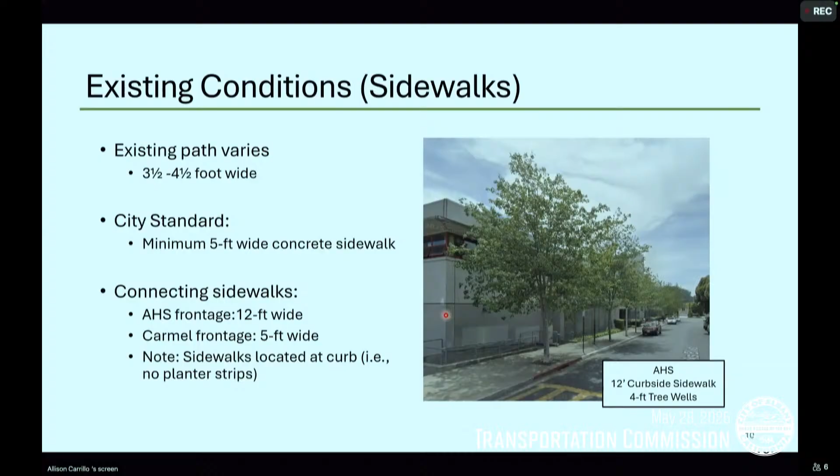And there's a picture of a 12-foot wide sidewalk. There are 4-foot tree wells, so it's effectively an 8-foot sidewalk next to the school. So what we're talking about is a 5-foot, potentially too narrow, up to maybe something more like an 8-foot that we could continue through this area.

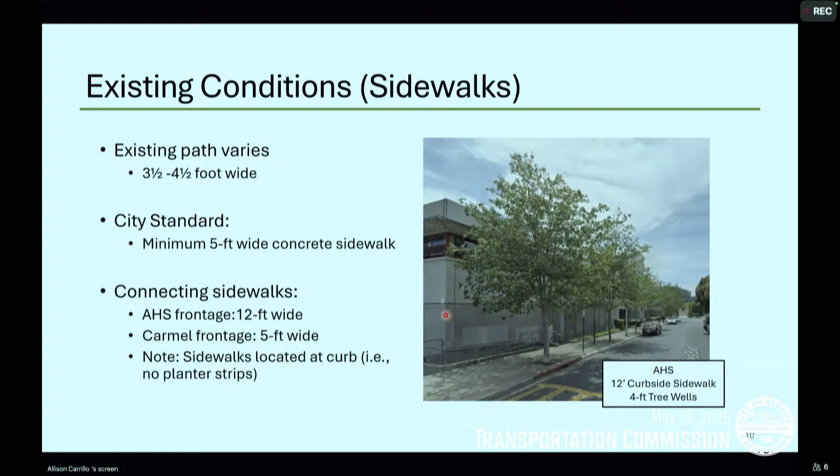Other existing conditions: we don't have any crossings. We don't have any curb ramps and formalized crosswalks or compliant ramps. We really want to make sure that we address those as part of the project.

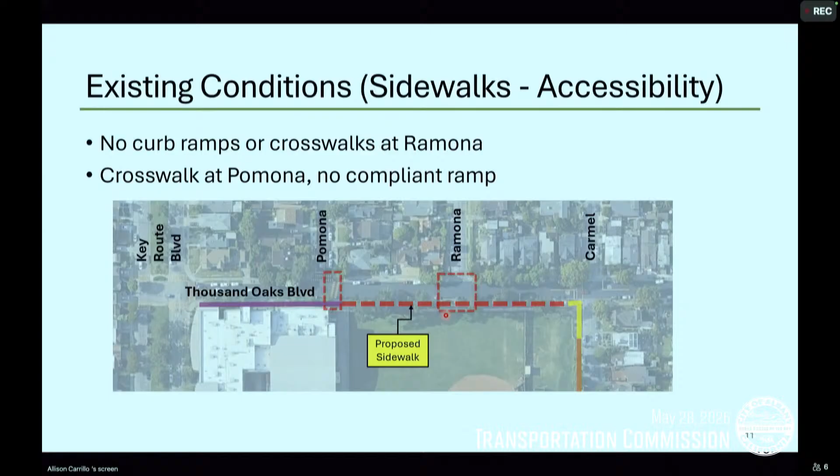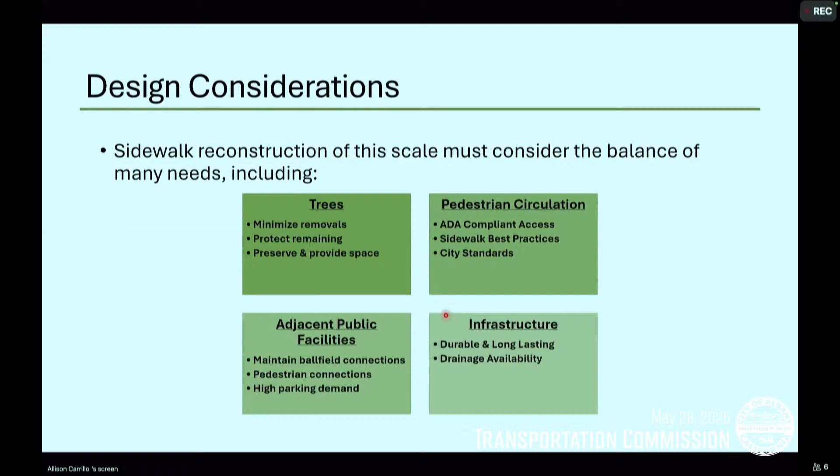Balancing all of this has to account for the trees, the park needs, adjacent public facilities, infrastructure, and pedestrian circulation. So the three concepts being proposed, or discussed tonight, alternative one is to keep the existing meander through the trees. This is generally not a recommended practice. It's not as comfortable for folks in wheelchairs or other mobility devices to have to adjust their path of travel, especially on more of a sidewalk configuration versus a park where meanders are more common.

Alternative number 2 is a curbside sidewalk. This would be functionally similar to the two connecting sidewalks on Carmel and at Albany High School. Again, the path width is something that needs some finalizing, because that changes the tree removals and other considerations for how we do our design.

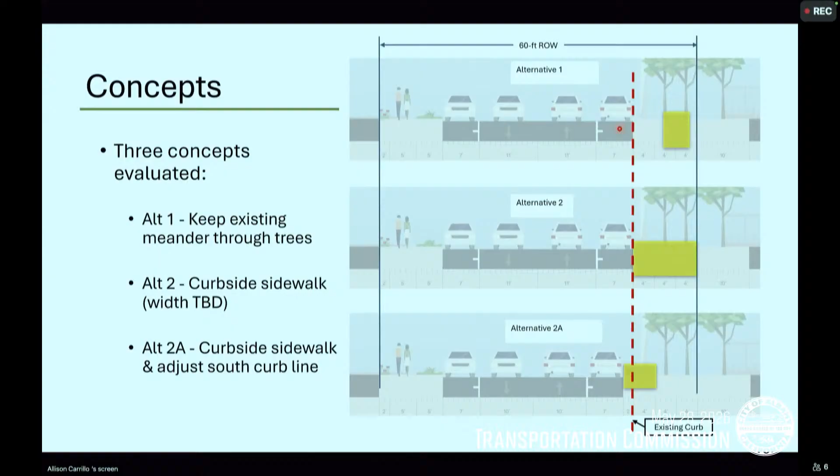The third, or alternative 2A, we're calling it this because it still keeps the sidewalk next to the curb, but looks at pushing the curb line out and taking advantage of the street being 2 feet wider in that north area of Memorial Park. This would allow us to provide and preserve a little bit more open space for larger trees. This is one of the remaining areas where we can really plant large trees. There are existing large trees reaching end of life, so we want to interplant with other large canopied trees.

Clarification: is the roadway 4 foot wider, not 2 foot? Yes, but it's only 2 foot wider if we want to keep the center line consistent. Oh, okay, thanks.

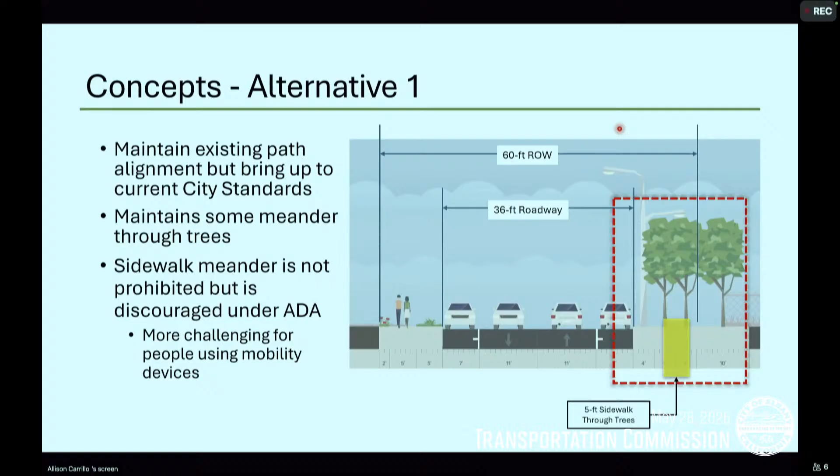Covered most of this, I'm sorry. I am going to try to skip through some of this unless we have major questions. Let's see.

Going back to the Parks comments, because they are also involved in this conversation with tree removals, but also the park access needs. They have a preference for maintaining a large amount of space, and they supported moving the project forward to ask for that 2 foot curb line adjustment in the Pomona to Carmel length of the street, and that's something we bring to Transportation Commission to discuss.

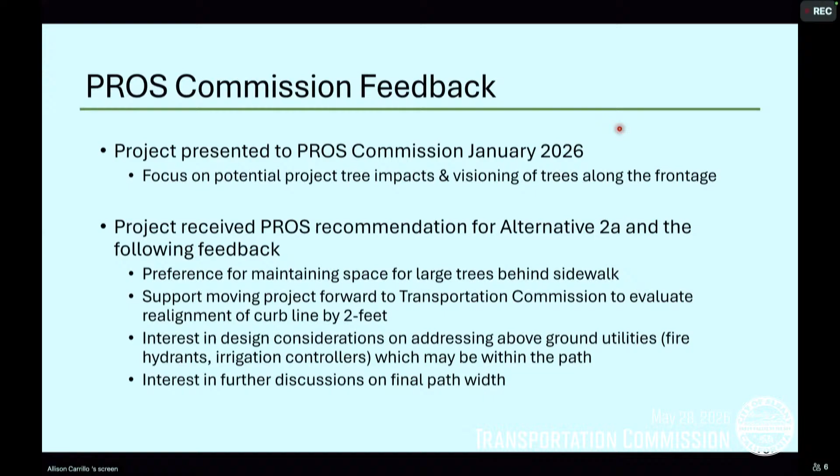They have interest in addressing above ground utilities, which we'll take care of, and interest in further discussions on final path width. I think that speaks to the earlier question or comment about the Carmel sidewalk being too narrow. What we show in our two configurations is a curbside sidewalk at a very, very minimum 5 foot width. And in the attachments, it showed the sidewalk diverting around some of the street lights.

But that's really not a very comfortable path. Having this wider still maintains a fairly large planter area behind the sidewalk. So feedback on maybe a sidewalk width or sidewalk clearance is appreciated. We are still early enough in design that we can accommodate some of those. It just comes with potentially increasing the amount of tree impacts, and we'll have to weigh that and balance that with park rec open space conversations.

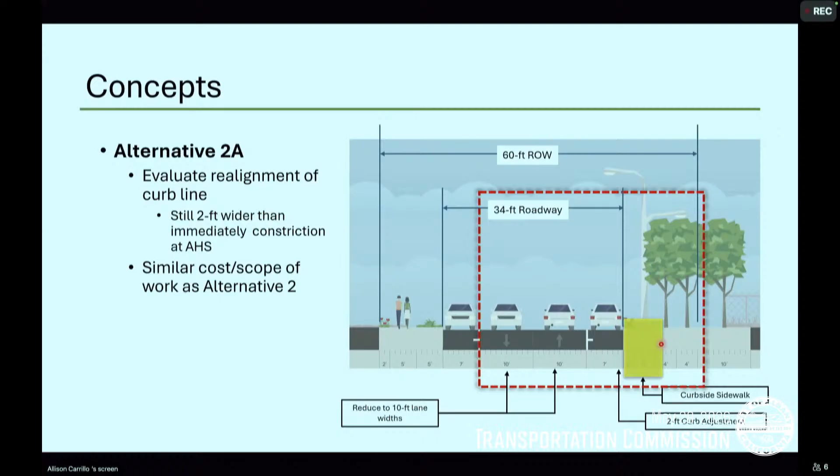So going back to, those are the 2 things: feedback on sidewalk widths, feedback on proposed curb line realignment and reduced roadway width, and see if there's any comments here or recommendations.

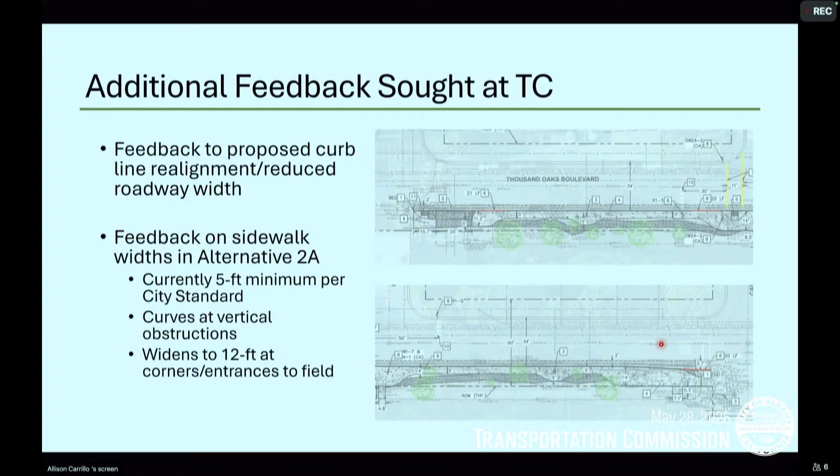I'll jump in on this. I go to the dog park regularly, and I do not walk on this side of the street because I've tripped, and it's hard. So I fully support all this work. I do not feel that 5 foot is wide enough, particularly next to a park. I would recommend at least a minimum of 6, which is like the ADA preference, so that you have a wider width. I would prefer 8, but I would say 6 should be considered a minimum.

An 8-foot clear, consistent with, there's places, yeah. Yeah, 8 might not, yes. No, not 8 foot clear, but like I say, minimum of 6, widen it if you can, recognizing that there are locations nearer there that it's already 5, probably 6 is adequate. I just generally prefer wider sidewalks. And I'm a little confused how it can be this relatively the same cost when you're moving the curb line, but I will trust you on that, and if they are the same, then I would prefer 2A.

Yeah, I looked at all of these, and I don't need to discuss it at great length, but I also came up with 2A as my preferred choice. I'm in agreement with 2A, and trying to maintain trees as much as possible with potential sections where it narrows slightly to accommodate a tree, I'm comfortable with that, like that sounds good, but keeping as wide as possible in general. Yeah, I would agree.